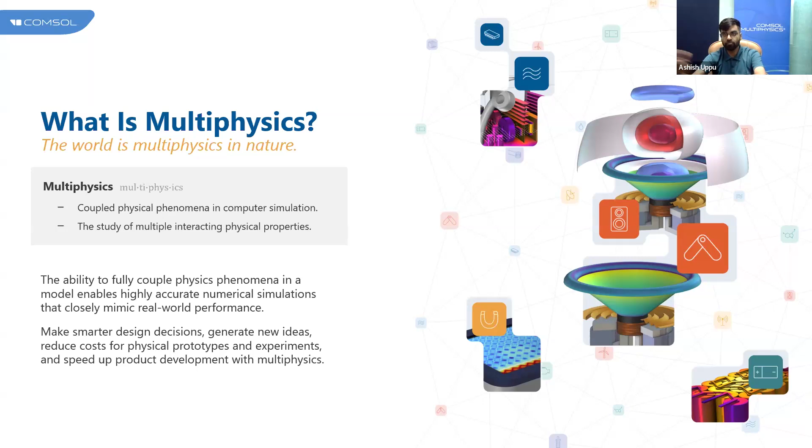You can use a very good simulation tool to reduce the costs for physical prototyping and experiments, at the same time to speed up your product development with respect to multiphysics. It also helps you generate high fidelity models, bringing real world phenomena accurately into the picture. So before starting, I'll go through a few manufacturing processes.

The idea here is I wanted to touch upon all the manufacturing processes that COMSOL Multiphysics has used previously, so that you'll get an idea or a feel of exactly what happens in the software, in the tool. So the first manufacturing process that I want to cover was titanium welding.

Titanium welding, as most people know, welding is a process of joining two metals together. If you have two dissimilar metals that you want to attach, we use a welding phenomena. Now titanium welding is a special case of welding process where it's highly unlikely to get experimental results out of it. That's the reason I've chosen this particular model, because titanium itself is a very hard metal.

Whenever you're joining those two, the temperatures are very high. So whenever you're trying to measure the temperatures, or the physical parameters or physical quantities in that particular process or setup, it becomes highly unlikely or impractical to measure them physically, because of the high temperatures involved. That's when simulation comes into picture.

Now, in simulation, you can go with a normal physics simulation where you just consider temperature, or you just consider structural deformation. But in this case, in COMSOL, what we are doing is we are combining everything.

As you can see from the current slide, on the left side is one of the snippets of the COMSOL session for building the titanium welding model. I'll be talking more about it in the demo. I'll show you a demo of the same titanium welding model, where I'll talk more about what exactly each particular option in the list means.

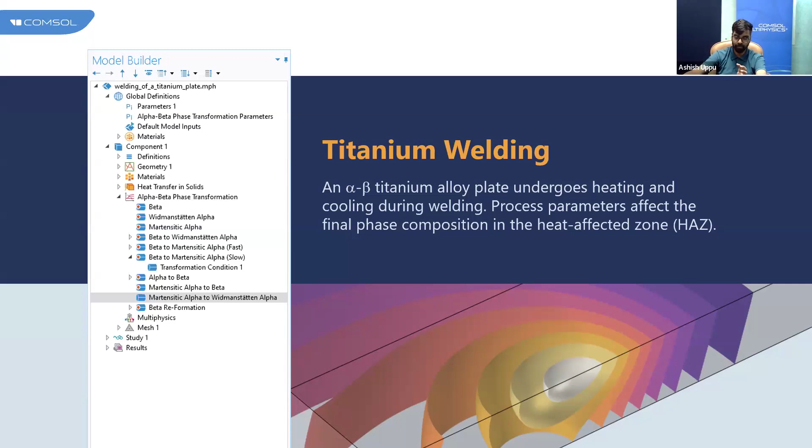The next example I wanted to show you was steel quenching, which is again a common process of softening or hardening the metal depending upon the rate at which you are cooling it. So steel quenching, or quenching in general, is an operation in which you decide the rate of cooling for a heated metal or material down to its recrystallization temperature.

So the final phase composition obtained is what decides the strength of that particular material. This is what quenching implies. The phase transformations during that process of cooling, and the rate of cooling, is what produces distortion and residual stresses.

This is again a classic example of two physics stitched together: one is solid mechanics, and the second is phase transformation. In this case it's steel, so you have austenite, martensite, bainite, pearlite, and ferrite transformations.

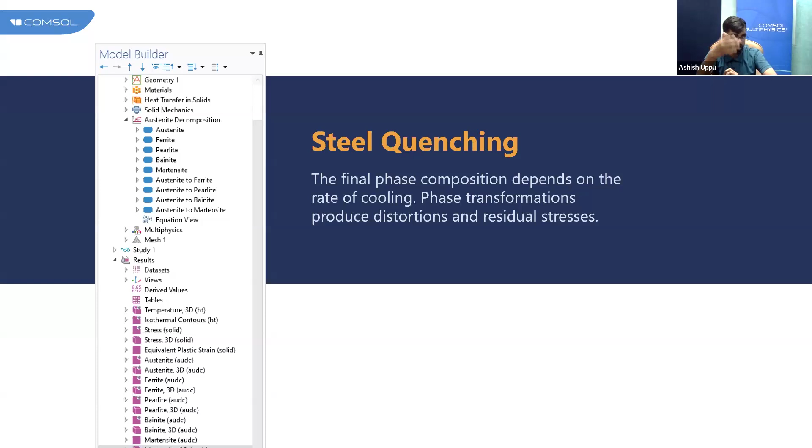We use that phase transformation dynamics along with structural mechanics to bring multiphysics into picture. How do we do that? This is what I'll explain next. Using the model builder, you can build a model combining these two effects. So coming to the multiphysics of phase transformation, how does phase transformation, solid mechanics, and heat transfer interact with each other? This is the main idea I wanted to show, and this is what happens behind any manufacturing process.

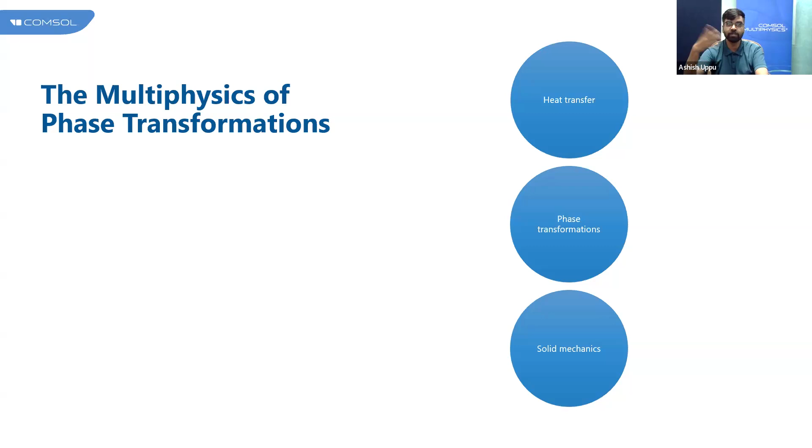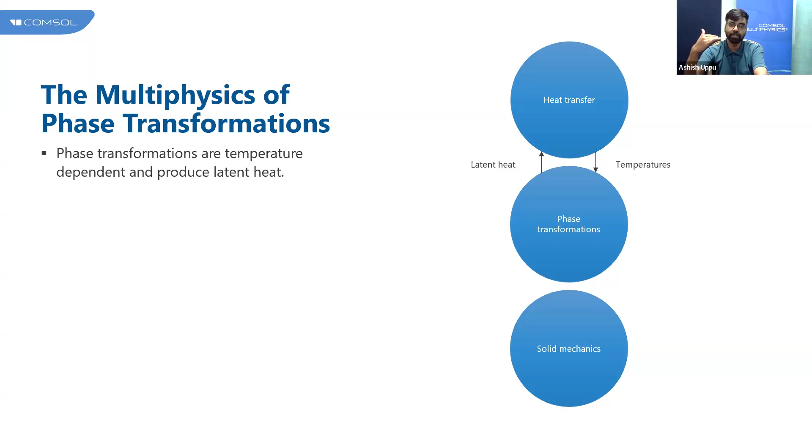First, phase transformations are dependent upon temperature, and they produce latent heat, because depending on the phase, obviously the melting temperature would change. So depending upon the phase composition, the melting temperature changes, and the latent heat changes. The relation between phase transformation and heat transfer is temperature, because phase transformation is dependent on temperature, and phase transformation determines latent heat, or the temperature at which melting of that metal happens.

Because of those temperature changes, there will be thermal strains and transformation strains generated. We call these transformation strains residual strains. So each phase transformation leads to residual stresses and strains generated in the material, which is taken care of by solid mechanics.

Now what is the outcome of these stresses and strains? The entire shape of your material will change, because the more stress or strain the component experiences, the more it deforms. For example, if you have a circle of steel undergoing transformation from austenite to pearlite or bainite, the circle would not remain a circle, because due to temperature and other factors it could keep changing. That's the reason there is a relationship between phase transformation and solid mechanics.

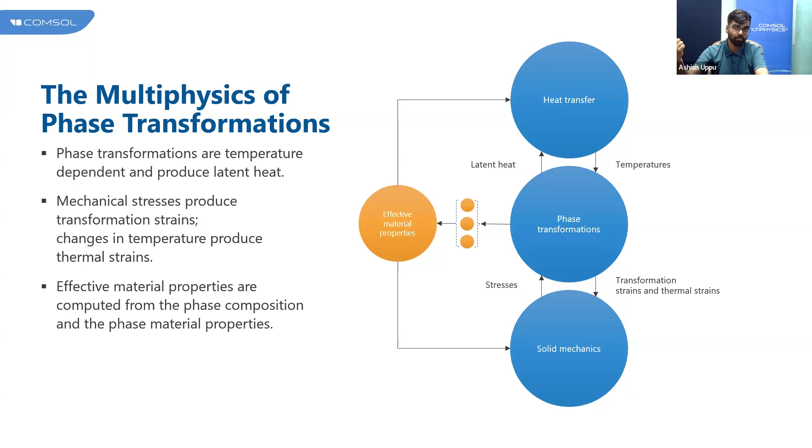Now how do these combined effects affect the entire model? The effective final material properties, whether thermal properties or structural properties from solid mechanics, will depend upon the phase transformation. The amount of each phase your material has will make a difference in thermal conductivity, heat capacity, and structural properties like Young's modulus and Poisson's ratio. The final output will give you the temperature field, phase composition, and residual stresses altogether.

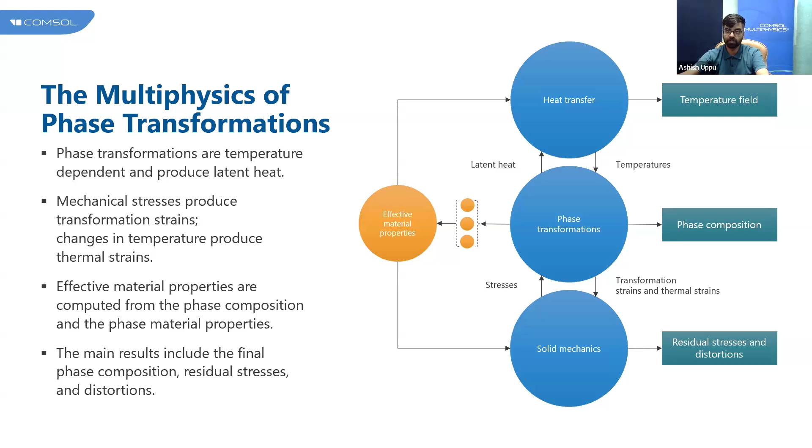More than 50% of people are new to COMSOL Multiphysics. So I think based on that, I'll focus more on the multiphysics phenomena part, so it will be more refreshing for people attending for the first time, who are experiencing the multiphysics tool for the first time. So now, whatever I've talked about until now, we have something called the Metal Processing Module within the software, which takes care of this. I'll be talking about it in the product portfolio as well.

I'll be talking to you about that as well. The idea here is the metal processing module is what is going to enable you to do whatever I have told until now.

Starting from the phase transformations, so either it could be ferrous alloys or titanium alloys, it could be stresses and distortions. As I told you, it could be thermal strains, transformation induced plasticity strains, or the latent heat.

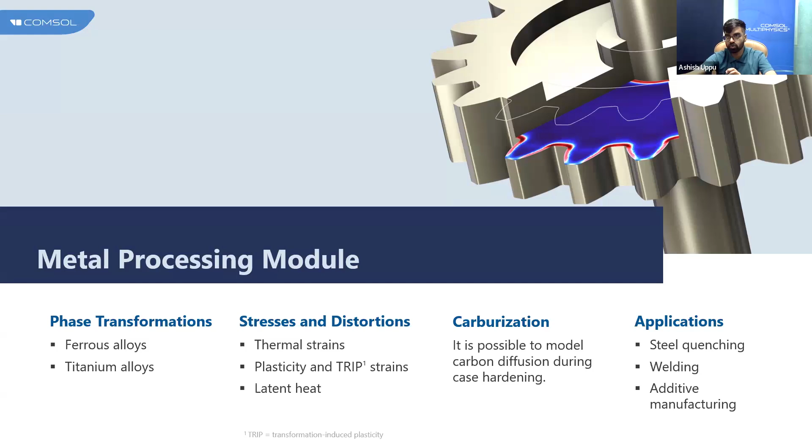Apart from that, you can have multiple applications which I have discussed until now. One is welding and steel quenching. Apart from that, we have another process called additive manufacturing, which we'll be discussing in the next slide.

Additive manufacturing is another case of multiphysics simulation in manufacturing. Traditional manufacturing process involves removal of materials. Any material you see, it could be a turning operation or machining. Usually what happens is you have a workpiece, you try to remove the material and create the final product out of it. That is one conventional way of machining, because it's much cheaper that way.

The latest one is additive manufacturing, where you add layers of material layer by layer to create the product. That's the main idea behind additive manufacturing.

We have an example which shows how to model an additive manufacturing process involving a few layers of material. In this case, I've taken 3 layers, added to demonstrate how the physics works out in the manufacturing process. In a realistic scenario, the number of layers could be hundreds to build that particular material, but the process and the physics remains the same.

So we use something called the activation feature in the solid mechanics interface of COMSOL, which helps you take care of the addition of materials here.

The current material consists of 3 layers resting on an infinitely rigid substrate. Why exactly am I taking a rigid substrate? So that my focus would be only on these 3 layers to make that particular specimen.

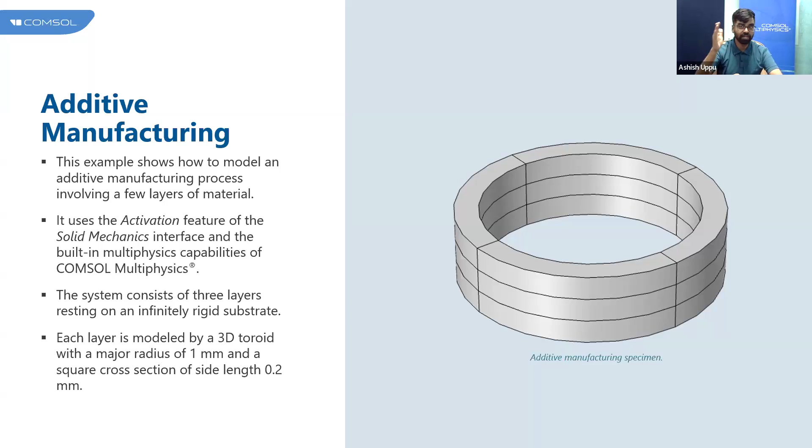Finally what we want to get is the temperature distribution of that specimen, because whenever I'm adding one layer at a time, the bottom layer would be cooler than the top layer, since I add one layer, then on top of it another layer. So the temperature difference between the bottom and top layer would be drastic - the top layer would be much hotter compared to the bottom layer.

Now because of this heat difference, the main problem would be the material undergoing distortion. That's the reason we need to check the temperature variation in the simulation tool, so that the material's temperature is not overshooting, so that it doesn't undergo distortion. That's the main idea behind plotting temperature variation, and that's what has been done here.

We have plotted the temperature variation to visualize which areas of the material are reheating, resulting from the deposition of top layers, which does not result in critical overshooting of the material. That's the main idea.

The idea behind any manufacturing process is to retain the shape and get it as close to the design dimensions as possible, or else there's no point manufacturing with wrong dimensions, right? The main idea is first to check the temperature, and second is the stresses, which I'll show you in the next slide - temperature to control and check the thermal strains that are getting induced in the material.

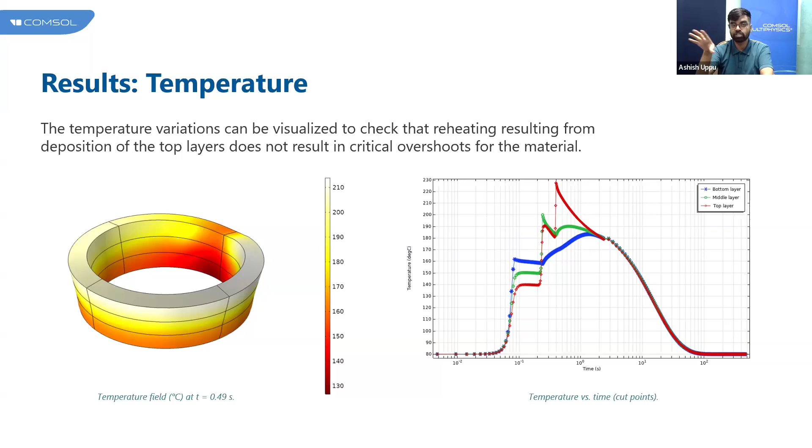In this case, on the left side we have the temperature field at t equal to 0.49 seconds. The second part is temperature versus time, plotted at particular locations - at each location of your top layer, bottom layer, and middle layer - to check and make sure that the temperatures are not overshooting. That is one thing. The next is basically the stresses.

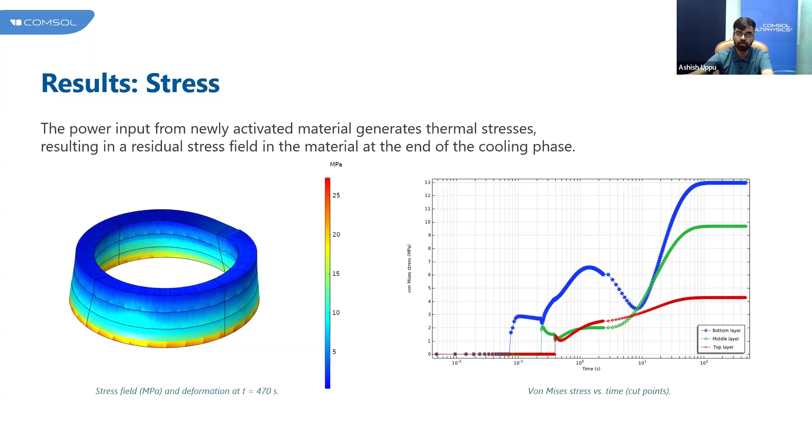This trial and error, if you're working on a prototype, usually requires tons of prototyping, mostly hundreds of prototypes, and based on that you have to arrive at a conclusion. So going with the traditional way of developing a physical prototype and working on that to arrive at a conclusion was kind of too costly for them.

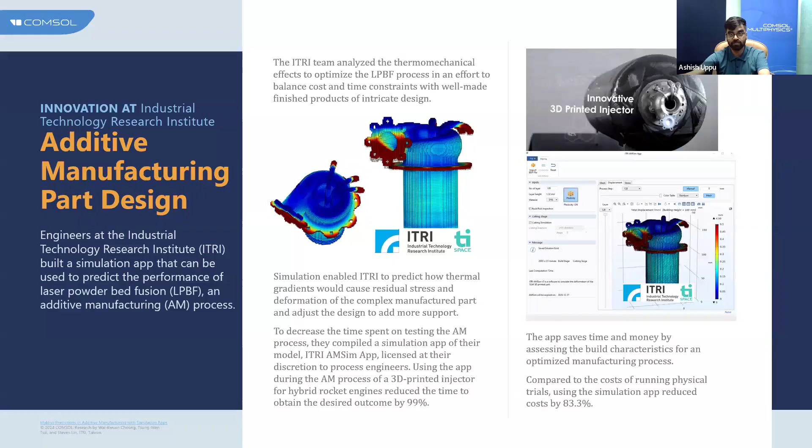Now coming to the next part. I think I'll start with the second poll question here. Most people want to understand performance and failure studies, so we have a few examples on it. Once we move on to the further slides, I'll be talking more about them.

So coming back to the next manufacturing process, which is curing. Curing is a chemical process which results in hardening of a polymer material by cross-linking of polymer chains. Where do we use it? For generating polymer materials, or more commonly composite materials, which you would see in most automotive and aerospace applications. Rather than using metals, people are now using composite materials.

The main fabrication is using molding and curing. These two are used interchangeably, combined, to fabricate the final composite material. Curing, in rubber terms, we call it vulcanization. This is kind of complicated, involving a lot of chemical processes and complex dynamics that happens in the background for obtaining the final product of hardening of the polymer material by cross-linking. Curing reaction interface has two models.

One is the viscosity factor, and second is the reaction models, which are standard models available in literature. So COMSOL has standard models. The idea of keeping this was to tell you that COMSOL has standard models available from literature, which you can use to directly establish your problem. That is one way of doing it.

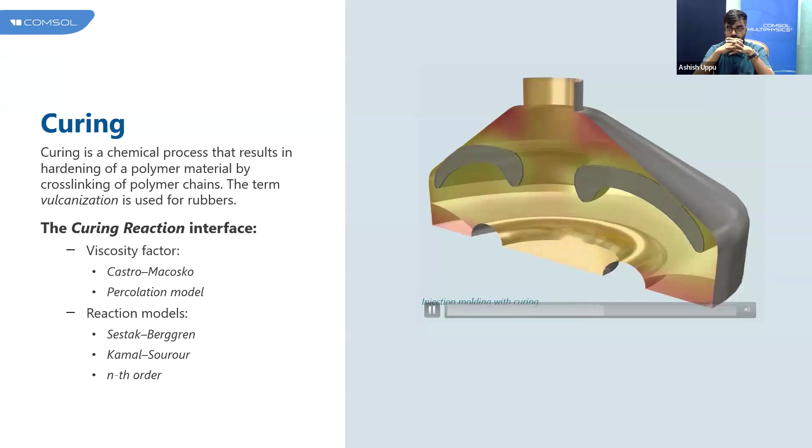As I told you previously, apart from curing, we have mold filling, extrusion process, coating flows, and resin flows in composite materials, which use the polymer flow module, another module similar to the metal processing module. We have something called a polymer module to simulate the flow of non-Newtonian fluids, which is an added feature in COMSOL, which I'll be talking about a bit at the end of the slide. So this is one thing that I wanted to highlight.

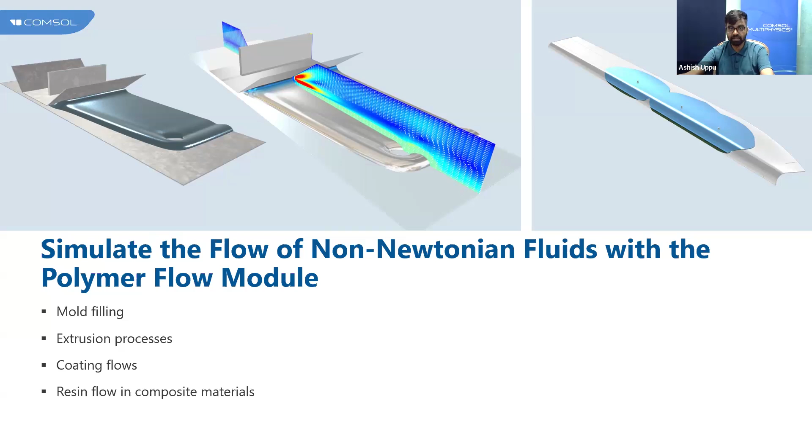Then we have laser heating. Laser heating involves contactless operations with high heat loads, and the idea is to make them very accurate and fast. One example which I have taken from our library model was laser focused through a semi-transparent medium, depositing heat onto a surface. This is again a very common kind of machining process where you use laser to remove material or melt down material.

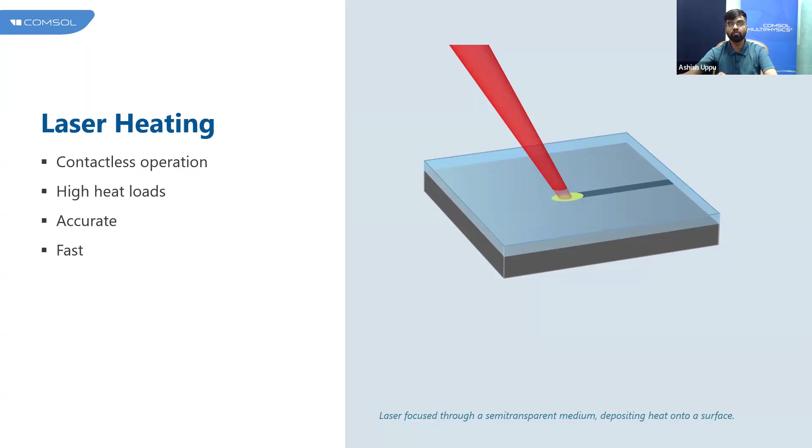Then we have aluminum extrusion, which is again a very common process involved in manufacturing. This model considers steady state condition of a billet flowing through a die. So we have an aluminum billet or workpiece, which is pushed through a die made of steel.

Now usually the die and the workpiece are of large scales. If you see in any plant setting, regular steelworking plant workshop, the die and the billets are of very large magnitude. So modeling these kinds of applications would usually be computationally very expensive, because there'll be a lot to model, and at the same time the dimensions are very large. So when your dimensions become very large, your model becomes very heavy. That's the reason we have an option called the symmetry feature.

Thanks to the symmetry feature, a quarter of the geometry is what can be modeled, and has been modeled in this particular application. Because if I model just a quarter, the rest I can actually tell the solver to extrapolate using symmetry. That was the main idea behind the symmetry function, which is an inbuilt feature of COMSOL, and this is where I want to bring in the idea of submodeling.

Submodeling in COMSOL is basically modeling a part of your domain. If you have a very big domain like a cylinder, you can just model a quarter of it, if it is symmetric, and then extrapolate the results accordingly. One thing is your accuracy won't be compromised, and at the same time your results will be much faster, because rather than solving for the entire geometry, solving for part of the geometry will take much lesser time, isn't it?

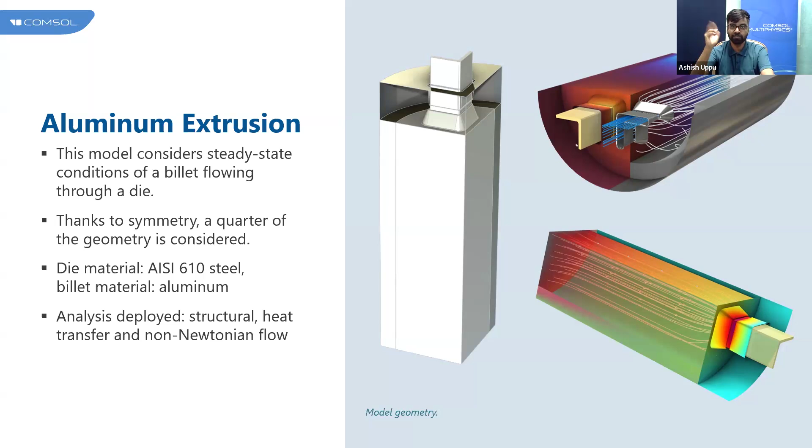It would be something like that. So you'd have toothpaste flowing through it. That's the kind of setting - obviously the toothpaste here would be very hot, which is aluminum. So it will be that kind of a setting.

Coming to some results and discussion I wanted to show: these are the temperature plots, velocity field and streamlines, and equivalent von Mises stresses. As you can see, the quality of results generated from the solver output is usually of research quality standard. This is something even our clients have given us as feedback. People usually use COMSOL for results and visualization, because the output it generates means you don't need another third party software to fine tune it further.

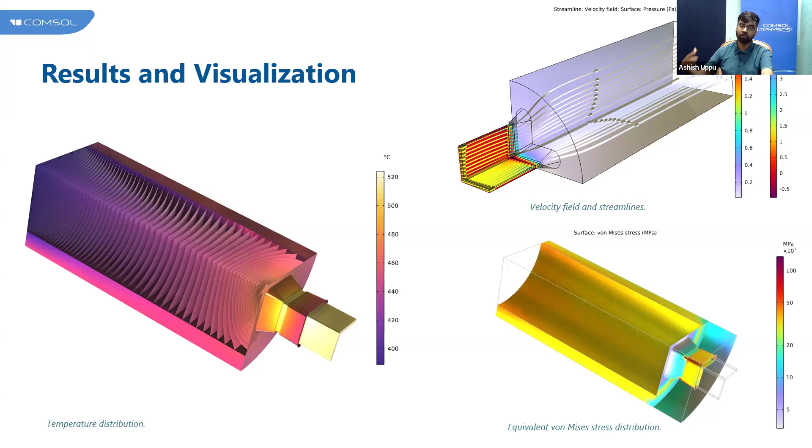Then I want to finally end the topic with another concept called the optimization module. We have something called optimization in COMSOL Multiphysics. COMSOL has features for shape optimization, topology optimization, parameter optimization, and parameter estimation. I'll briefly give you an overview of what exactly happens.

In shape optimization, you optimize an existing geometry or design. For example, the design is held against a certain load, and you're trying to optimize the shape. In this example I've taken, it's a wheel rim, where you are trying to optimize the shape of the wheel.

Then we have topology optimization, which can be used to find the optimal material distribution given some constraints. So if you consider a wheel rim, you want to remove some material out of it, create pockets, or add material - that's what topology optimization does. While shape optimization only takes care of the shape of a particular boundary or geometry, topology optimization focuses more on the entire domain section of it. That's the reason it's called optimal material distribution.

Whereas we have another optimization called parameter optimization, which is focused on determining the optimal dimensions and operating conditions, and the shape and position of the geometry as well. In this example I've taken, an electric motor stator position - we have an electric motor with a stator and a rotor. Considering the rotor part, I'm determining the rotor speed and at the same time the rotor dimensions, which is the position of the different components constituting the rotor, based on a particular objective function and a set of constraints.

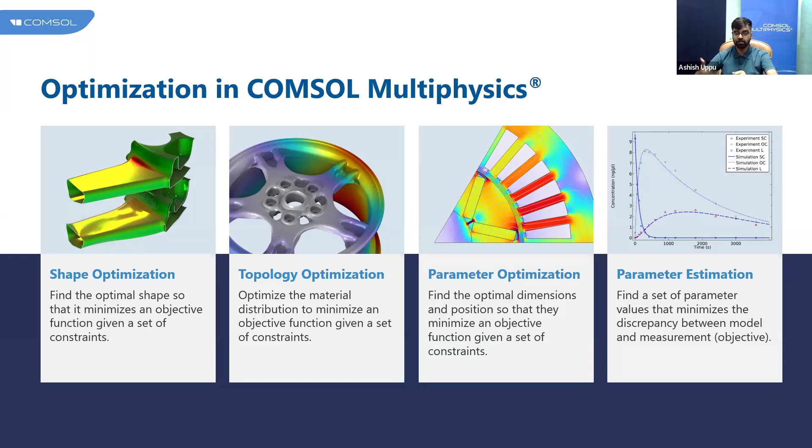The final one is parameter estimation, which is used to find a set of parameters that minimize the discrepancy between model and measurements. This is commonly used for experiment post-processing of experimental data. In the slide I've taken, we have concentration versus time - the dotted points are the experimental data, and the line is the simulation data. We used parameter estimation to determine the closeness or relatability of the curve with the dotted line. That's the main idea behind parameter estimation. People working in data analysis and post-processing would be mostly familiar with curve fitting and those kinds of applications where parameter estimation comes into picture.

The final use of the optimization module I wanted to end with is a case study: the optimization module used for optimizing factory conditions at Manufacturing Technology Centre (MTC), a company in Europe. The idea was to make their production more precise and customizable, where additive manufacturing calls for a new approach to factory operations. They used a simulation model and app to help factory staff make informed decisions about its operation. They created a model of the powder bed fusion, mimicking the same CFD and environmental conditions, which would affect multiple variables from the weather outside to the number of machines operating and their position - meaning the outside environment as well as the number of machines within the factory.

So those were taken into picture, and they added more realistic conditions for it, like the CFD conditions. CFD is basically the computational fluid dynamics part of it, and the model was able to predict how heat and humidity inside a powder bed fusion factory may affect product quality and worker safety. So that was the main idea behind it.

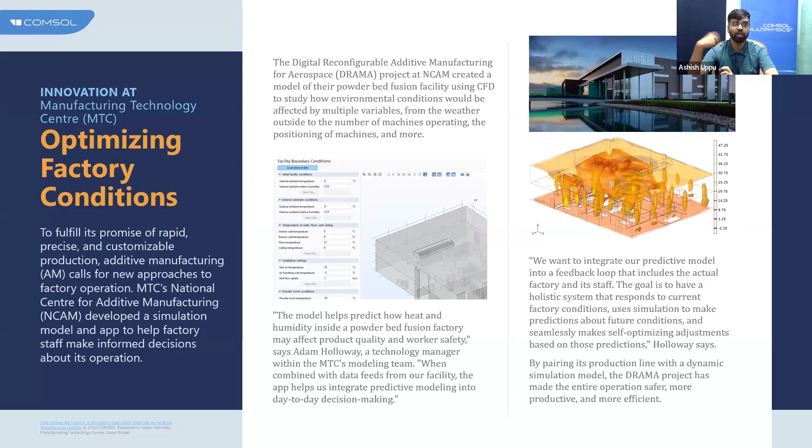So they combined this data with the everyday predictive modeling, day-to-day predictive modeling, to take decisions whether to increase the output, increase the number of machines, increase the number of workers on the shop floor, or to cool the entire shop floor by adding a ventilation system. So these kind of small things helped them optimize the factory conditions accordingly.

So this ends my presentation on the manufacturing part of it. So before ending, I just wanted to fully cover the COMSOL product portfolio, what exactly COMSOL has to offer for you.

So COMSOL Multiphysics, if you see to my left side, we have the base package, which consists of the model builder, where the entire model gets built. We have the application builder, which is used to build simulation apps from models. A simulation app is basically an interface which takes in input and gives you output.

So the user, whoever is using the app, he need not build a model or understand simulation as a whole. He just needs to give inputs and you get an output. So it's kind of an input-output scenario, more of a graphic user interface kind of scenario.

Apart from that, we have the COMSOL compiler, which compiles simulation apps into executable files which you can run freely on any system. And you have the COMSOL server, which is used to host and run your simulation apps accordingly.

So on top of the base package, we have multiple modules available, starting from the electromagnetics module, structural mechanics module, multiphysics module, fluid and heat transfer module, chemical module, and then there is the interfacing module. So any particular module or application for any particular problem statement that you want for your particular manufacturing process.

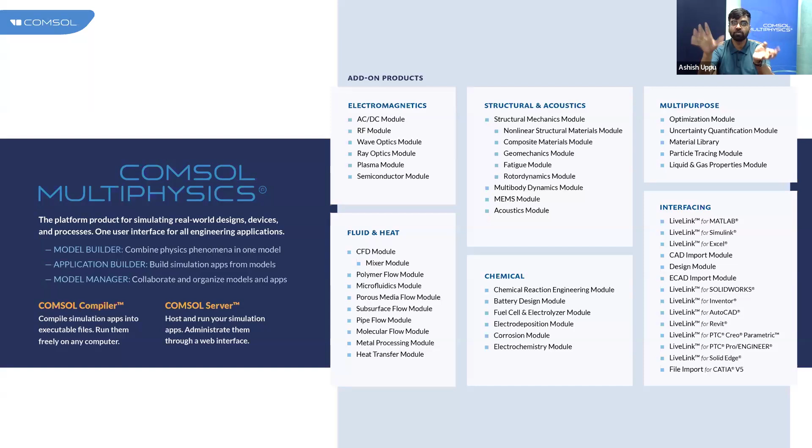Just take an example, suppose you're working on SolidWorks. You take the interfacing functionality of COMSOL with SolidWorks. So what the interfacing does is it creates a communication between SolidWorks, so that whenever you're making designs in SolidWorks, that data automatically gets copied in COMSOL, and whatever changes you make in SolidWorks automatically gets changed in COMSOL. That's the main idea behind interfacing.

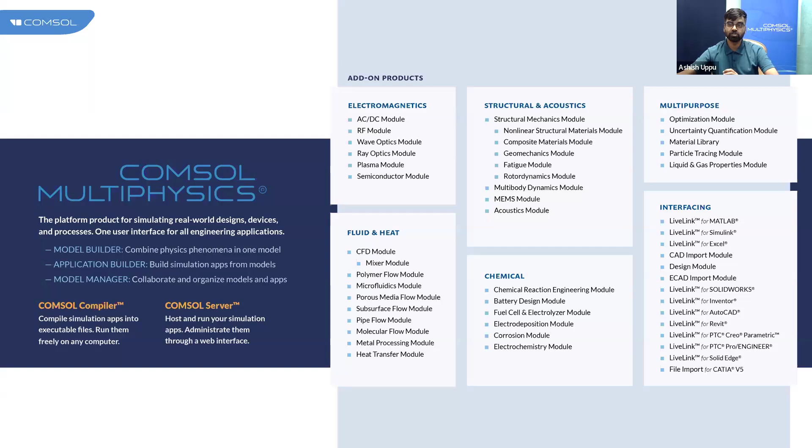We call it LiveLink internally. It's a trademark term we use for the linking between the two softwares. This is something COMSOL has in store which is very different from other softwares you find outside the market. The main idea here is to make the process of simulation streamlined and much more efficient, so that it's much easier for people to make the models. That's the main idea behind LiveLink.